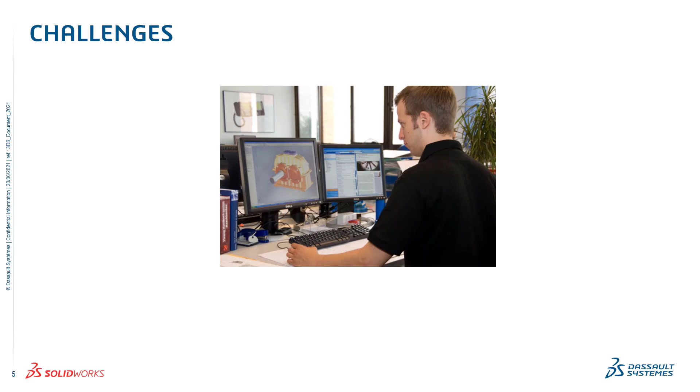But let's start with introducing the topic of the new trends that will be driving the future of design. The first topic is the IT overhead. As you know, lots of software that we are using today, think about your CAD or your ERP, require an IT infrastructure that needs to be maintained, updated, and protected. We are hearing more and more customers that have been attacked by hackers, their data is stolen, and they require some ransom to get the data back. So companies need to invest a lot of money in security, backup, disaster recovery strategies.

The next topic is mobility. So the software companies that have a good vision for the future from now until the next 10, 20 years well know that young people will guide the future trends and they are adapting to this. So today, many professional apps can work from a Chromebook or a tablet or a phone, and even your favorite CAD could work from mobile devices.

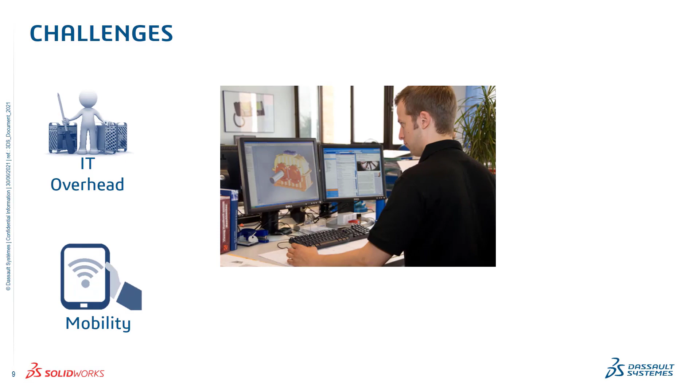Then let's talk about the data management. Recently, I was reading an article that said that young students don't really use personal computers much; they rather know the concept of devices and apps, but don't know the concept of folders because they are just saving into their device, and they know that when they are launching the app, they simply click on the open command, then search for what they're looking for. Maybe they can filter, for example, filter a document, and then they will find their data. So in the future, all of us will interact with our data with an experience that looks a lot like search engines.

And then we have the topic of collaboration. You know, lots of tools are gradually replacing emails. If I asked you how many of you are using WhatsApp or Telegram to communicate for work topics, many of you would say that you're doing that. And today, professional social networks are a very useful tool to follow up with our clients, partners, and collaborators in order to be always up to date on their projects or initiatives. Moreover, the pandemic has obliged us to learn how to use virtual meeting tools, and this enables us to communicate with anyone in any part of the world.

Then we have the topic of more power, which means the topic of modeling. Today, designers want to have powerful tools that will allow them to tackle much more complex projects in a very quick way. And the technologies are there because we have new paradigms like artificial intelligence, cloud computing, or design assistant technologies, or even generative design that allows us to create impossible shapes.

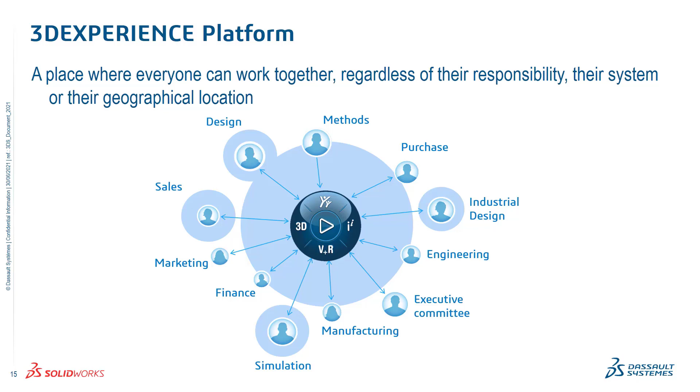So how does Dassault Systèmes help us with this topic? Well, Dassault Systèmes has developed the 3DEXPERIENCE platform, which is a cloud-based environment right in your browser that connects all the design project stakeholders, their ideas, the design data, and the solutions. And there is a plethora of tools for really every member of your team, not just design tools. So tools for project management, data and lifecycle management, 3D preview and markup tools, and built-in collaboration tools at every corner.

But today we're talking about browser-based design. Browser-based design tools can work from any operating system because they work from a browser. So they will work from Linux or from Mac. And they don't require any install. You simply need to launch your browser in order to use your app. And also they are being updated automatically, which means that the day after the update, you simply need to launch your design app and you'll find the new functionality and new features. Also, these tools have been developed with native touch support. So the UI has been really conceived to allow you to model and design from a tablet or even a phone.

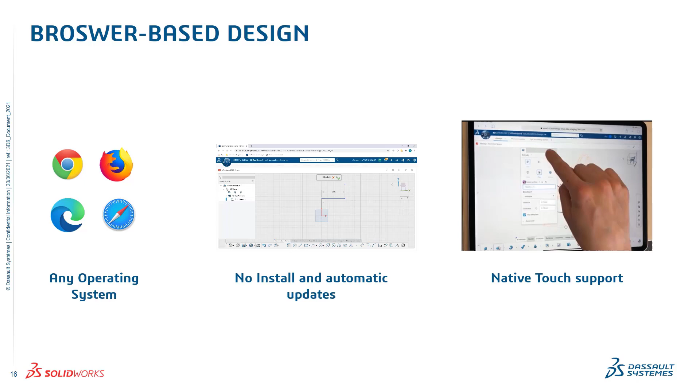These tools also feature automated data management, so this will allow us to get traceability like revisioning designs, keeping track of history, or maybe restoring an old iteration and taking another pathway by creating, for example, a branch.

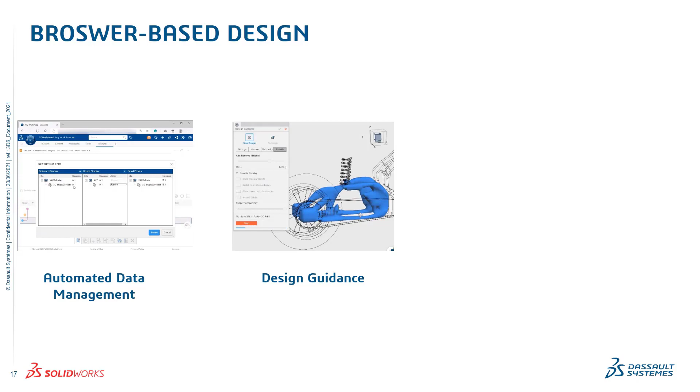There are new technologies, for example, like design guidance, which means that once you define your material, your loads, your constraints, and avoid areas, this tool will suggest you the shape of this component that will minimize weight.

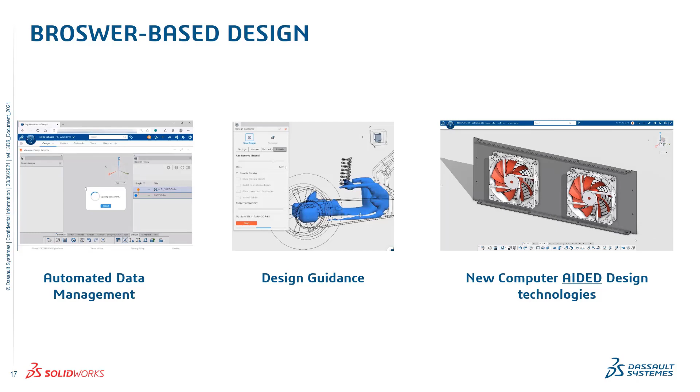And there are also some computer-aided design technologies, and I'm underlining aided because in this case, for example, I need to assemble that washer, and the system will suggest me with the artificial intelligence what are the most likely locations where I would like to mount that washer, and it will automatically mount the washer for me. And these technologies are learning from us, and they will improve as we are using them.

So he's going to assemble the winch, and he's going to use bottom-up techniques and also top-down techniques. But let's start with the bottom-up techniques. So Eric is going to start his day in the browser. So he's going to use XDesign directly in the 3DEXPERIENCE platform without installing anything.

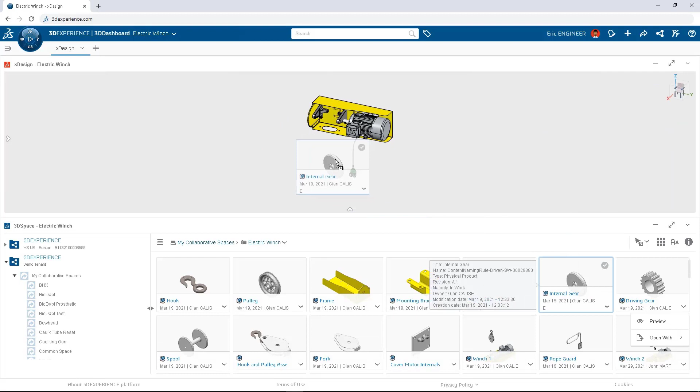And now Eric needs to insert a couple of components in this assembly, which are a couple of gears. There are at least a couple of different ways to add components. So you can simply browse to your data, to the list of your components, and insert the component by drag and drop inside of the assembly.

Or another option will be to simply search your component. You can use the precise name, or if you don't, you have filters on the left where you can filter by date or by meta properties. Then you can drag and drop the component in the assembly once you find it.

Here we can see that the insert component command has some new tools like the ability to insert more than one instance of the component. In this case, we need only one gear, so we will leave the default value of 1. We can also toggle a more convenient view of the assembly with the view selector. And we will start creating mates.

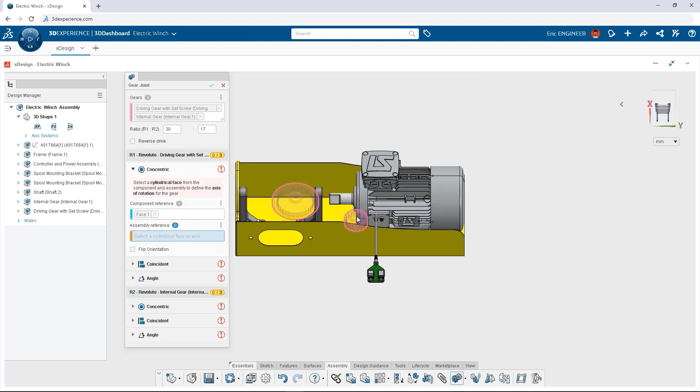So we have all kind of mates that we can leverage like in any design tools, but we also have some advanced mates that in XDesign are called joints that will allow you to create gears, rack and pinions, pulleys. In this case, Eric will create a gear joint. So all you need to do is selecting the two gears, and in this case, we are defining the gear ratio.

And then we're going to select the components to define all the mates that are needed to define this gear joint. In this case, we have a concentric mate, then we have a coincident mate to define the location of this gear. And then we also have an angle mate that will be used to basically drive the gear mate.

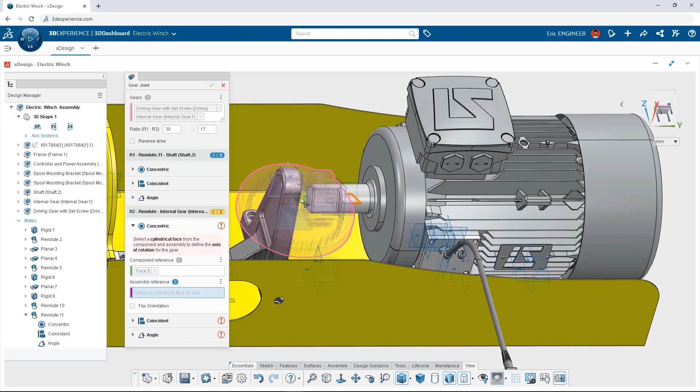You can also leverage some view filters, because in this case we want to show the planes, because this will be useful to define the angle mate that will actuate the joint rotation. So as you see, we are completing this gear joint that will connect the two gears, but also will connect the gear

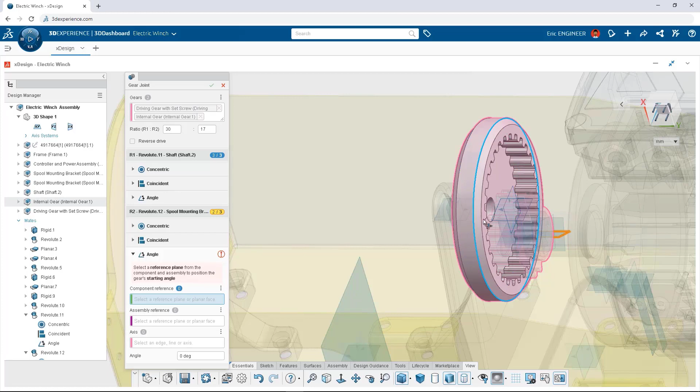to the bracket. So we'll finish like before, selecting the references for the coincident mate and also for the concentric mate, and then we will select the planes to define the angle mate. And the gear joint is finished. And also we can test the motion by simply dragging the components to check the real motion.

XDesign also features some quick shortcuts like the V hotkey that will allow you to toggle the view filters. In this case, we're hiding the planes because they are not needed anymore. The next step will be modeling a new component that will be the spool, and in this case we will use some top-down assembly technique.

So let's summarize what we've seen. You can assemble your designs from anywhere and from any device. The user interface is very intuitive because it's been created by the same team that has created the excellent SOLIDWORKS user interface. And you also have some advanced mechanical mates to simulate motion.

So next we'll be showing how you can model mechanical parts. In this case, I mentioned that we are going to create the spool, and this will be done with an in-context technique. So we can call it a top-down assembly technique.

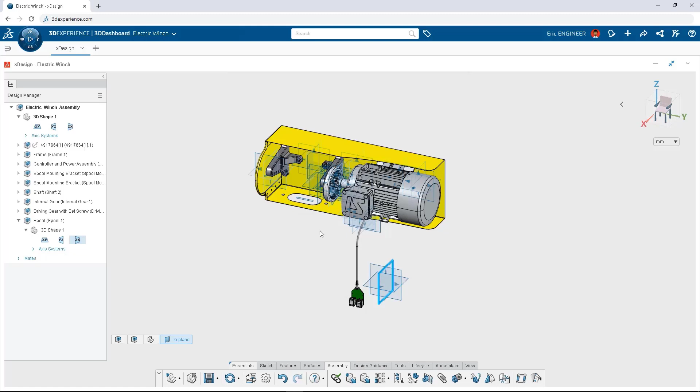So Eric will select the insert new component command. He will give the new name to the component, so he will call it spool. Then he wants this component to be exactly centered with respect to those two brackets. So he will insert a few mates on the planes in order to make sure that the design intent will be respected. Also here, we have the ability to choose if we want to activate external references.

By activating external references, you have the ability to create, let's say, adaptive components. So the spool will be able to update, for example, if the distance between the two brackets changes. So I will leave on the external references, and Eric will start a sketch. So he's going to create a rectangle. And as you see, it will create some references with respect to the bracket's existing geometry. In this case, the sketch will be completely defined.

Then he will add some more geometry to create this spool. By pressing the S key, the shortcut bar will appear, and this will allow you to select some sketch commands, minimizing the mouse travel. So in this case, I'm going to choose the trim command to eliminate some geometry. As you see now, there is some blue geometry, which means it's not completely defined. So I will create some dimensions to define that geometry. I'm putting a first dimension, and then as I put the second dimension, the geometry will become completely black, which means completely defined.

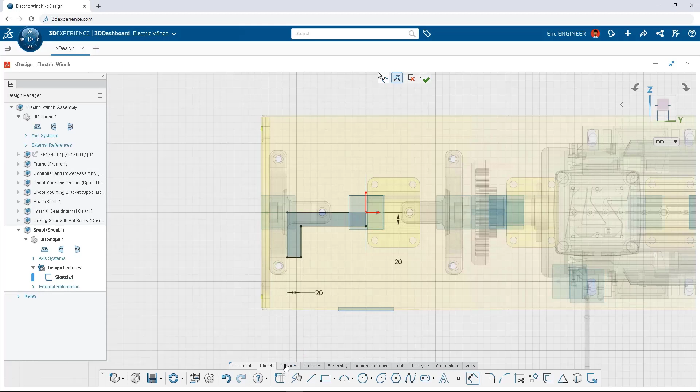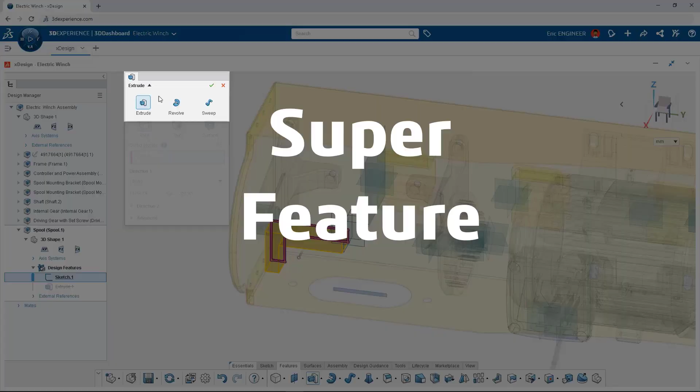Then I'm going to go to the Features tab, and I'm going to invoke the Extruded Boss command. If I were in a traditional CAD system, I would have to cancel the feature and recreate it from scratch, and maybe all the downstream features will fail. In this case, we have the concept of super features, which means that I can switch between an extrude, a revolve, or a sweep as desired, and the feature will switch, and also the downstream features won't lose references and will update. In this case, I'm going to change the feature to revolve, so all I need to do is select the revolve axis to define this revolve feature.

Then I need to create some fillets, so I will select one edge, then the context toolbar will allow me to quickly choose the fillet command to reduce mouse travel. And here we have the first example of artificial intelligence. I can select the selection helper icon, which will give me some suggestions on where it's most likely that I want to create other fillets. So I will confirm, but I can still select additional edges for my fillet command. So it will be 5 millimeters, and I will confirm the selection.

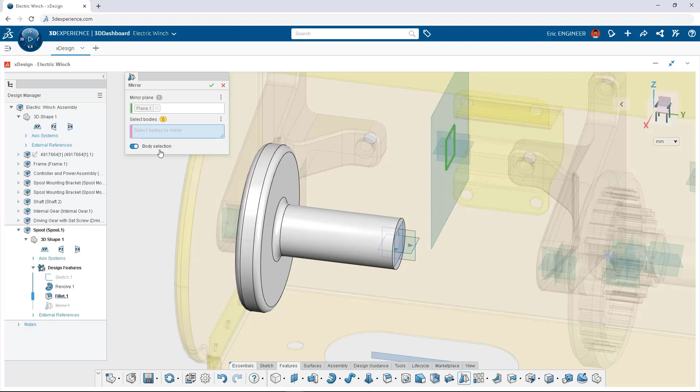Then I'm going to mirror this model because the design intent is to have a component that is always centered between the two brackets, so I can see my nice preview, and then I can confirm. Then I need to add some more geometry. I will create a new sketch. But rather than creating geometry from scratch, we have the ability to reuse existing geometry thanks to the insert sketch command.

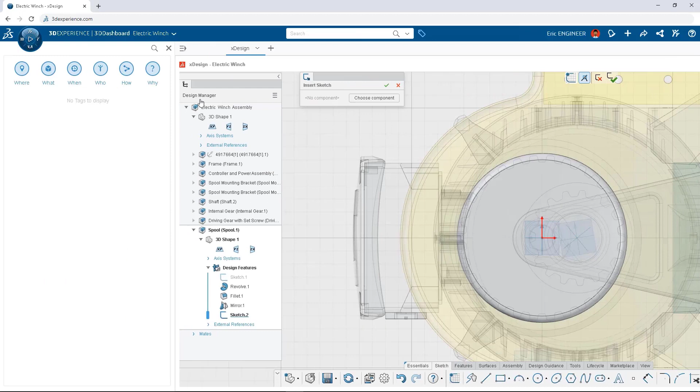So this command will allow you to search for a component where this sketch geometry was present. In this case, I remember that the sketch geometry I need is present in a component named skeleton key lock. So I simply type the name of this component. I can select this component, and then the insert sketch command from a drop-down menu will allow me to select the sketch that I want. So I will select the skeleton key, and then I will insert the sketch. And this will save me a lot of time because this is geometry that I could reuse from another component.

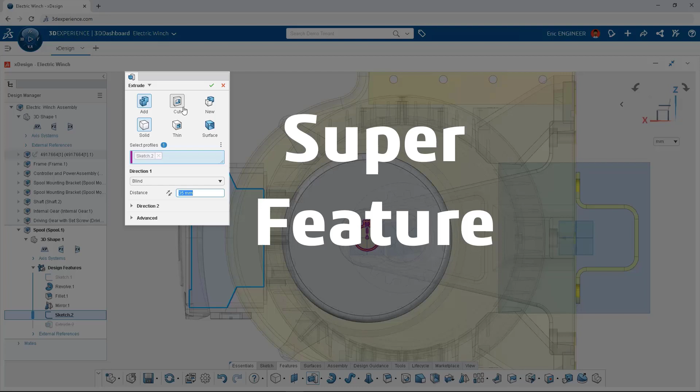Then I'm going to create a cut. Again, I chose the extruded boss, but this is not a problem. I don't have to cancel. I can switch to a cut feature, and I could even from this command create a thin feature or even a surface. There is a lot of flexibility thanks to the super features. So in this case, I will select the cut extrude command. I will define a through all direction cut, which will completely cut my model.

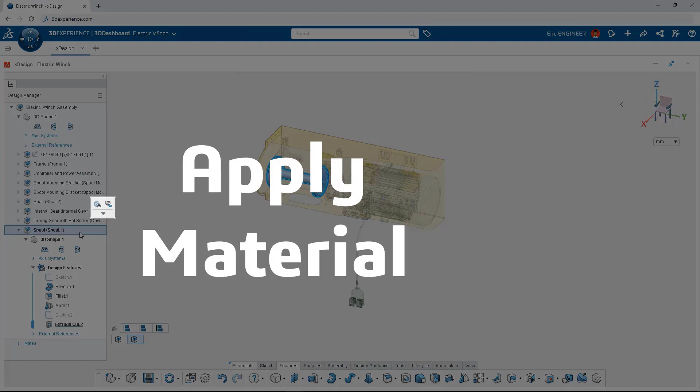And the last thing that Eric now needs is to apply some material. So he will select the component, and then he will choose the apply material command from the context menu. So Eric, in this case, can choose the 1023 carbon steel.

And then we're finished with the part. We can switch to editing the assembly by simply double clicking. So as you see, this is really very quick. And we want to test how robust this parameterization is.

In this frame component, there is a layout sketch that defines the distance between the brackets. So we're going to modify this sketch. And here we have a 250 dimension that will drive the distance between the brackets. So I'm going to change this distance from 250 to 270.

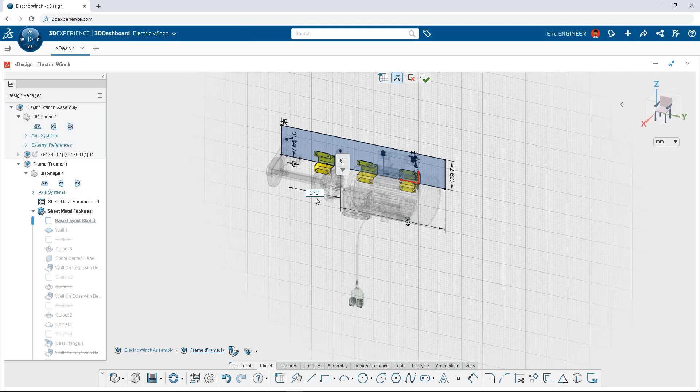And the result of this operation after the rebuild is that the distance between the brackets will increase and also the spool will follow up. Next, Eric wants to check on the progress made by Debbie on the controller unit, which is the green PCB you see connected through a cable.

Eric double clicks on the controller and power assembly, and he gets this message that pops up and says that the component is reserved and also mentions by whom it is reserved, which is Debbie. This means that he won't be able to make or save any changes, but there's good news. He can send a request to Debbie to unlock the geometry.

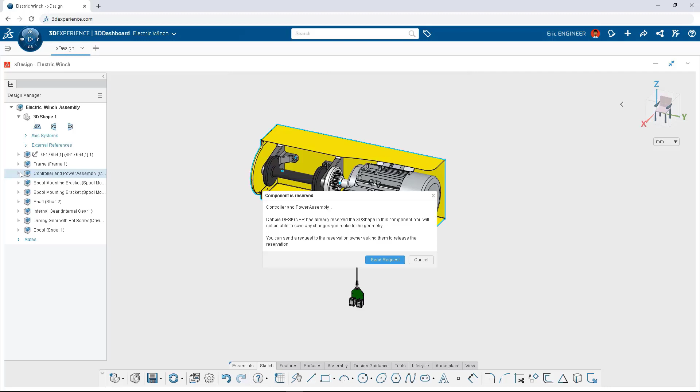So he will click on send request, and this will give Debbie Designer a notification instantaneously that Eric needs to work on that model, and Eric's work is pretty much done for now. So let's recap what we've seen. You can make parametric part design from anywhere, any device. You have new modeling paradigms like super features and artificial intelligence.

And with the built-in data management, you can collaborate when you are in a team, for example, by getting this warning that someone is using your file, and then you can ask to kindly unlock it. The next topic will be the design of the controller with subdivision modeling. So in this case, we will switch to Debbie Designer, and she will be in charge of designing the controller using sub-D modeling with an app called xShape.

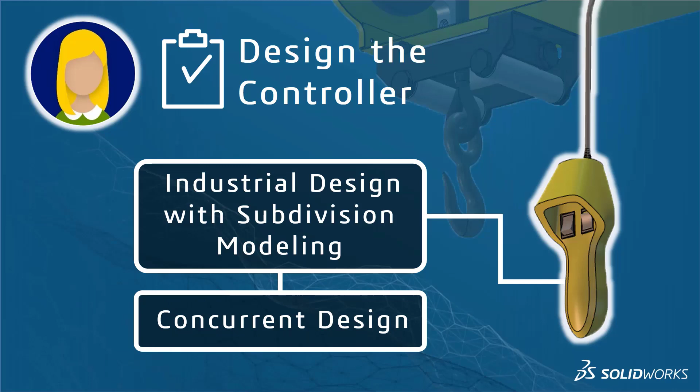And she's going to do this at the same time as Eric is working on the assembly. So we're going to switch from Eric, who was working on the assembly, to Debbie working on the subdivision modeling. So Debbie will see the notification from Eric that is requesting to release the lock.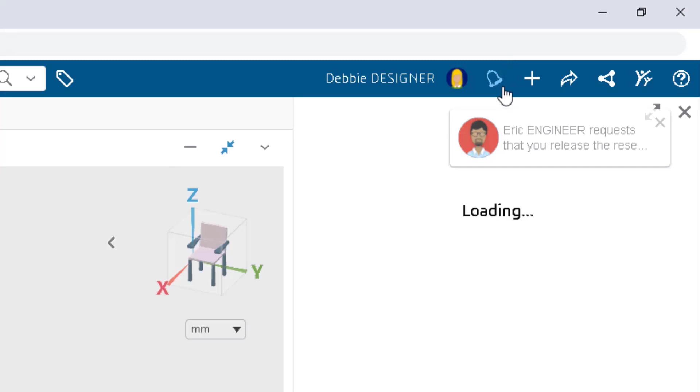So you can check your 3DEXPERIENCE notifications by clicking on the bell icon, and by clicking on the notification you get the opportunity to unlock the model. But at this point Debbie is still working on the assembly, and she's not ready to give it up yet. So she's starting a conversation with Eric through the side panel, informing Eric that she's still working on the model and that she'll message him when she's done.

Debbie starts working on xShape, which is a sub-D modeling app. And the first step is adding a primitive, which is almost like a digital hunk of clay. She's going to add a box shape, and she can resize it in any of those principal directions. She can also change the number of control loops that go around the model.

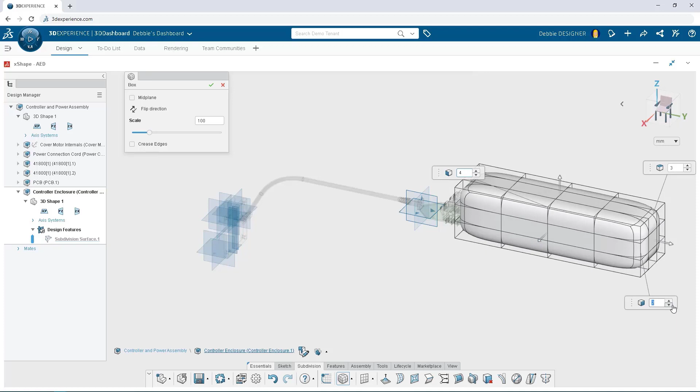And we usually say that less is more, meaning that you should start with less subdivision to have more control of the shape, and then you can refine later on where more detail is needed. What you see now is the robot, and this is the main tool since it's the main way to manipulate the model. It looks like a triad, so the arrows are used to translate the whole body or just the selected area of the model.

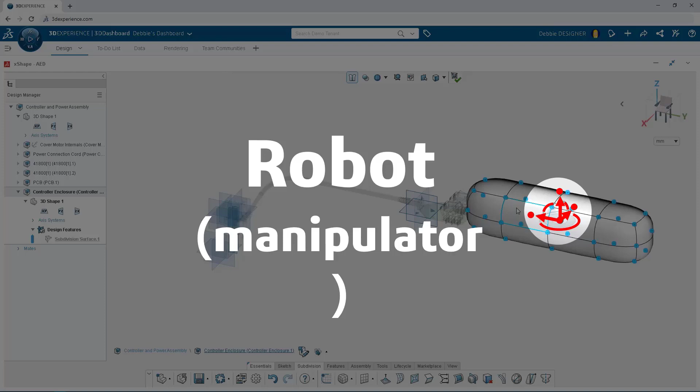Then you can also use the arcs for rotating your selection, and then there are the points at the end of those arrows for scaling. And you can translate, rotate, and scale all in one tool, and that covers a big percentage of what you'd actually want to do with subdivision modeling.

Debbie will align the model, but she needs to have it centered with respect to the middle plane. So in this case, after moving the model, if she selects the plane, the in-context toolbar shows a command to center the sub-D model. The in-context toolbar will show up with different commands based on what you select.

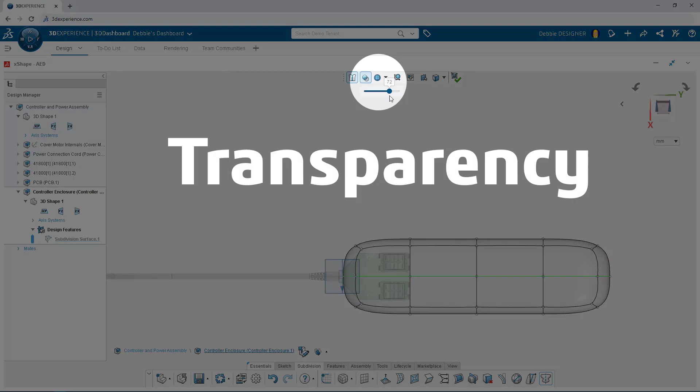xDesign and xShape are predicting what will be my next move. Then, after centering the shape, Debbie will select the icon to turn on symmetry, which means that whenever I make a change to one side of a model, that will also happen on the other side. And when you design around internal components like an enclosure, it's very nice to get a reference for size and shape with being able to turn on transparency.

And we can also scale, and you can do it by simply dragging points. You can also translate the sub-D faces to reduce the overall length, and you can also move the whole body. And we'll also refine the side by using the little arcs to rotate the surfaces of a model.

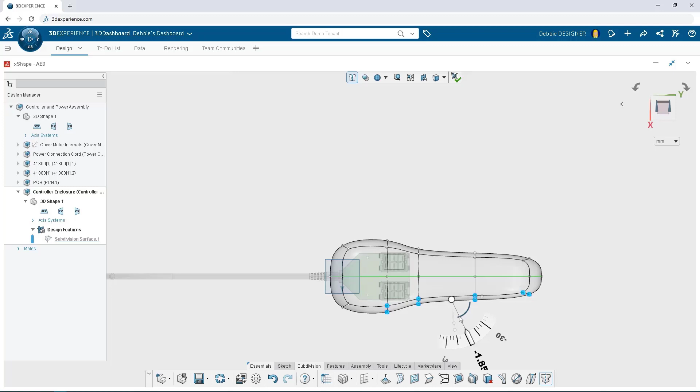After I get the general size and shape of this model, I want some protrusion on the top of the model for ergonomic reasons. And for this purpose, I can click on the face, and then from the context menu, select the Extrude command. And this command will add a protrusion out of the front face. And another quick way to modify geometry without using the robot is inserting loops. So in this case, I'm selecting an edge, and then after selecting the insert loop command, it's creating a new loop perpendicular to the edge that I selected.

And now here's another way we can add more control: the subdivide faces tool. So I selected 5 faces. I will select the subdivide face command, and this way we can refine the shape in the region of those selected faces. With sub-D modeling, everything is always curvature continuous, but maybe I don't want everything to be so soft. I want some sharp corners, and that's where the crease edges command will come into play.

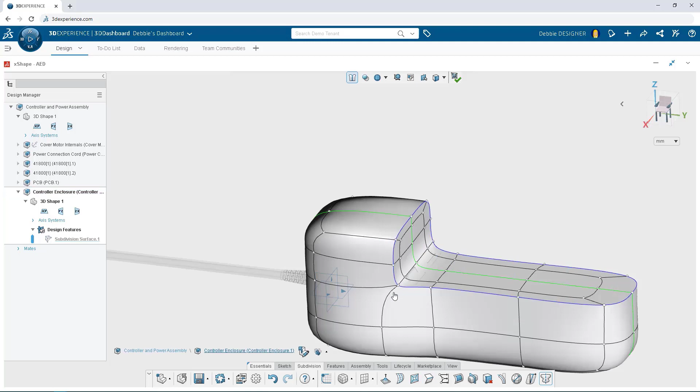I'll crease some of the edges, but this command is also very useful when you want to create some hollow regions of a model. I'm basically creating an area that will host the buttons, and I will add more creases to make the model look better. And then I will select some faces and simply push them in to create the hollow region. Also, I don't want those edges to be curvature continuous, so I will select them, and from the context menu I will add another crease.

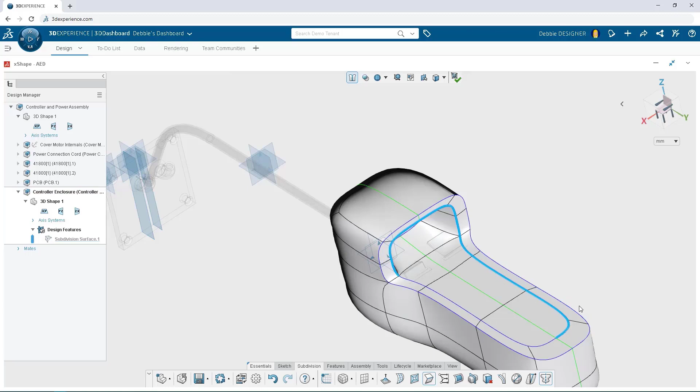So notice that the same team that designed the best-in-class SOLIDWORKS UI is involved in designing the UI of these tools of the future. I never touch the toolbar. All the tools are at my fingertips near my mouse.

I'm going to make further modifications, and then I'd like to highlight some specific robot settings, because right now the robot will automatically align on my selection, but if I need to move faces only in the XYZ direction, I can change the robot settings. So in this case, I will right click and then I can select the XYZ option, which will allow me to move the faces only in the XYZ direction.

So we often get the question, how precise is subdivision modeling? Well, it's as precise as you want it to be. One help can be numerical input. I can select everything I want, and then instead of pushing and pulling the arrow, I just click on the arrow, and then I can type a numeric input for how much I want it to move. In this case, I'm going to move the faces by 5 millimeters, but you can also type -5 to go in the other direction. That's a way to have a very precise dimension.

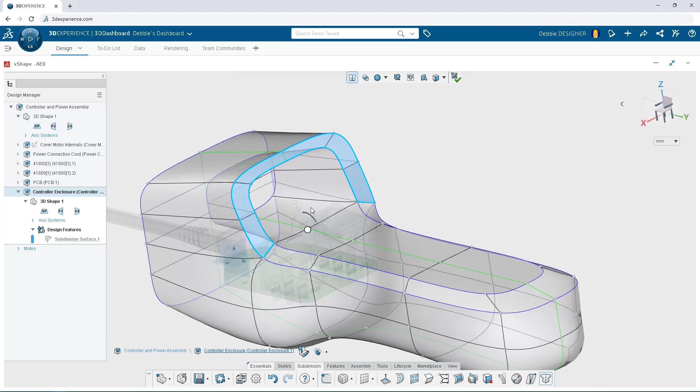When you manipulate the faces, the result is based on where the robot is, but in some cases you might need to move the robot to get the results you want. Think about the rotation. Indeed, I want to rotate the selected faces about the bottom edge, so I can put the robot there and then rotate the faces about that hinge point. I'm going to select some faces since I want to make sure that they're all flat, and for this purpose I'm going to use the align coincident command from the context toolbar.

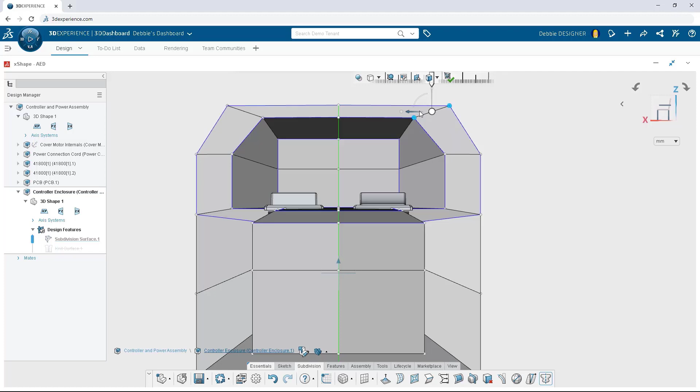So after making the face flat, I can activate the cage view to see what the surfaces really look like, because sub-D modeling has its foundation in polygons, which are then smoothed out and become surfaces. And the cage mode will basically show the polygons. The advantage of cage mode is that in this mode you can make faster modifications and you can quickly identify interferences and make adjustments, although there is a specific command that will highlight any self-intersecting faces on your subdivision model.

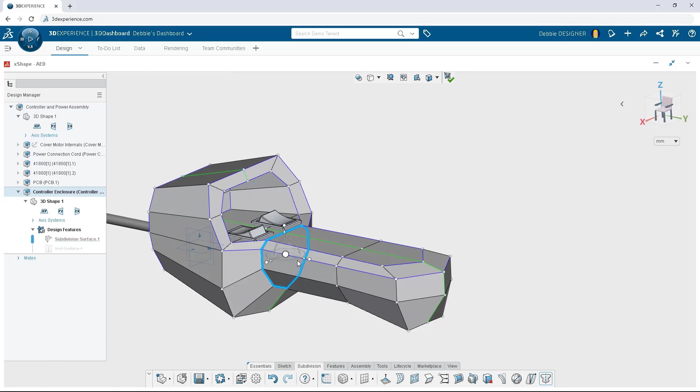So you see, you have a lot of flexibility of making some modifications to make the aesthetics of this model much better. If we had to do these modifications on a parametric model using surfaces, we would have needed a lot more time and maybe faced some errors. We finally go back to the surfaces mode to see how the model looks, and then we can do some further refinement of the model. The model looks very, very good.

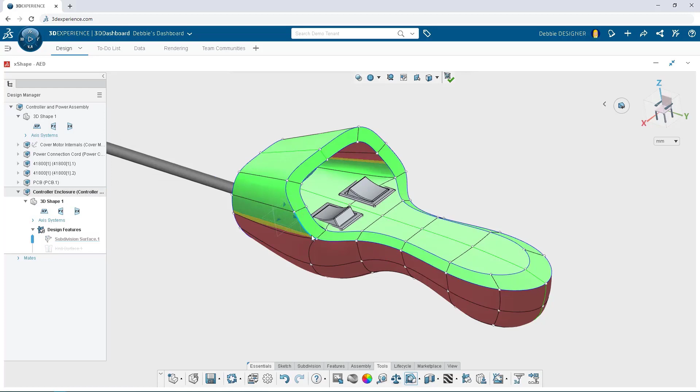xShape also includes draft analysis tools. What's great about it is that it's dynamic. I can set a draft plane and it will colorize my model with positive and negative draft. I can change my model and watch the colorization dynamically change, and this way I can make some adjustments to make the yellow color disappear. So the faces with no draft have been eliminated.

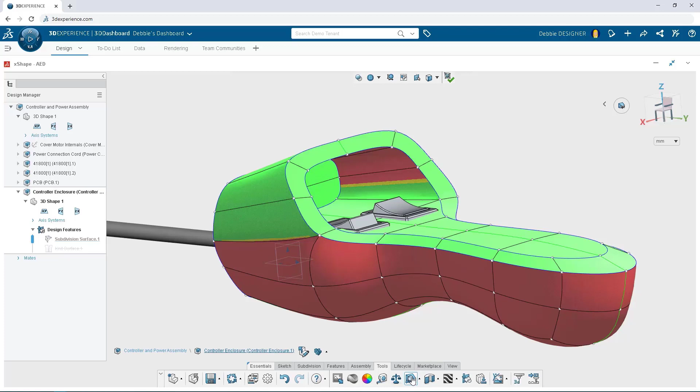But then I need to make some parametric modifications, and what's great about our browser-based design apps is that they can work together. So once I'm finished with the sub-D model, I can switch to my parametric modeling design app, which is xDesign. After switching to xDesign, the interface hasn't changed at all. What's different is just the set of commands, which in this case is features to create parametric functions instead of free-form modeling.

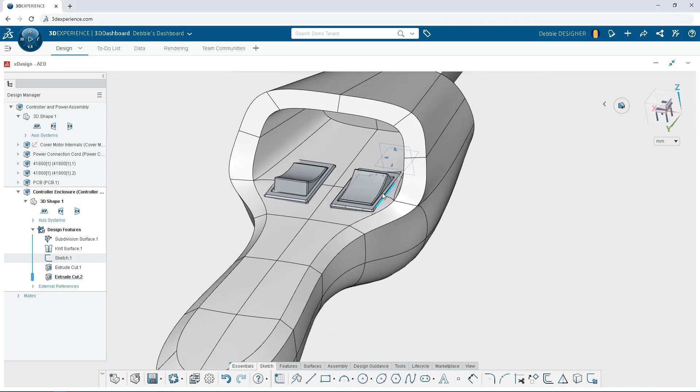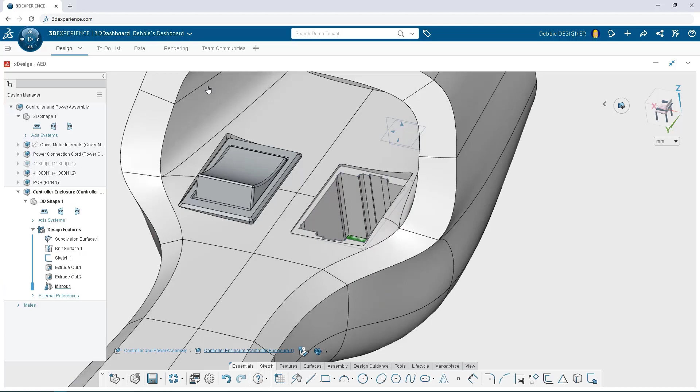In this case, I will create a through-all cut for the button. And notice I didn't even need to create the sketch. The face was used as a profile. I will hide the button to show what the hole looks like. And then instead of recreating the cut, I will press S to make the shortcut bar appear. From here, I can select the mirror command and mirror the cut from one side of this model to the other. This modeling is almost finished.

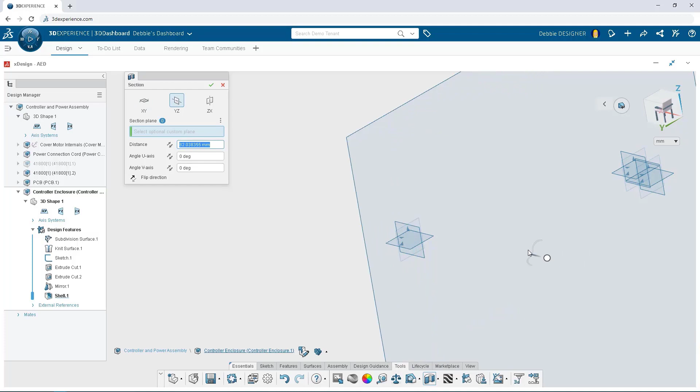I need the final touch, which is creating a shell to add a uniform thickness to the model. So in this case, I'm going to define a 1 mm thickness. I will shell the whole model to make it ready for injection molding. I will get my preview, and in order to understand the result of this shelling, I can use a convenient section view command to show that this model is actually hollow. So I will select the YZ direction. I will flip the section view. And of course, this is just a concept. More features will be needed to make it moldable.

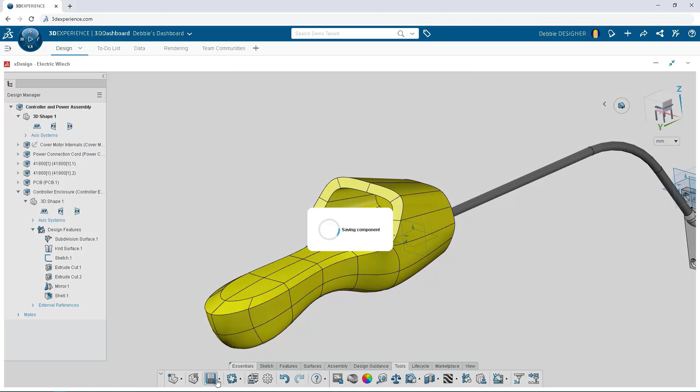Then I can change the color of the model, so I can choose a yellow color. After changing the color, we can save this component to the 3DEXPERIENCE platform on the cloud to make it available for everybody. So I click on the save icon. Also, the design apps feature the ability to create to-do lists. Since I had a task defined for this model, I will drag and drop the model to a task which was in work state. And since I'm finished, I can move my task to the completed state, so that my peers will know that this work has been done.

So we want to close the loop with Eric, so let's get back to the conversation with him. We will let Eric know that we're done with the controller subassembly we were working on. So Debbie is done. This means that Eric will need to do a refresh, which will reload the latest version of the subassembly from the server to see the changes. We will now switch to Eric. Debbie said to refresh, so let's click the refresh button to refresh that specific subassembly. Eric likes Debbie's work, even the color, which matches the sheet metal frame, and responds to Debbie.

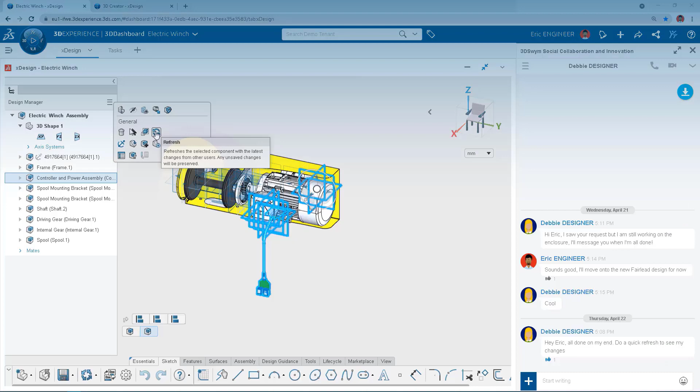So let's summarize. With xShape, you can conceptualize in seconds and very quickly create a complex model. You have the free form given by subdivision modeling, but you don't sacrifice precision and control because you have all the tools to wield them. And we've seen that with the immersive communication tools, we can collaborate very efficiently with our peers.

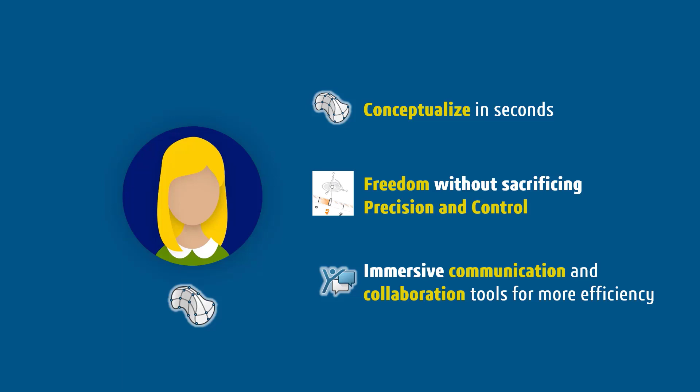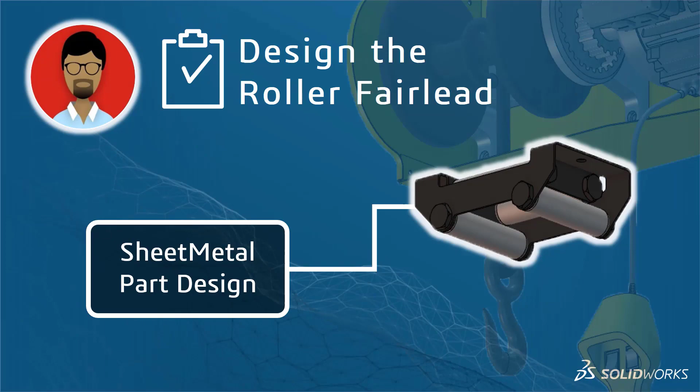So now let's see the next topic, which is the design of the sheet metal roller fairlead. We will go back to Eric, who will be in charge of designing this sheet metal part using some sheet metal part design techniques. So let's start working on this fairlead frame. We will open another widget, and here we have a subassembly with some layout surfaces. Basically, these surfaces have some dimensions that will define the spacing of those rollers, but this will also drive the fairlead frame.

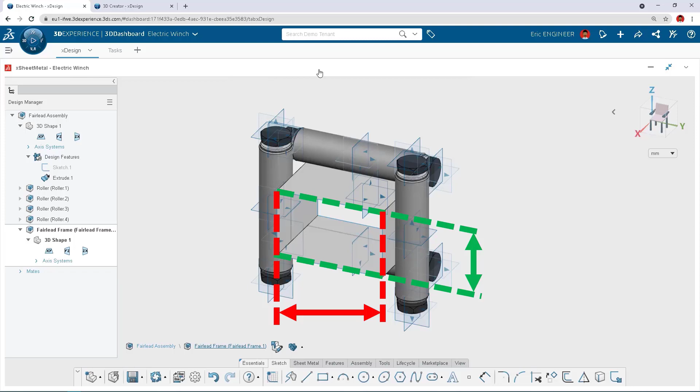So Eric will start by sketching the base plate. And in this sketch, he will reuse as much existing geometry as possible, for example, by using convert entities or by creating some geometry that will snap to existing entities. In these design apps, dimensioning is very easy. You simply need to click on an entity, the dimension will show, and then you simply need to change it. Let's press S to bring up the trim tool.

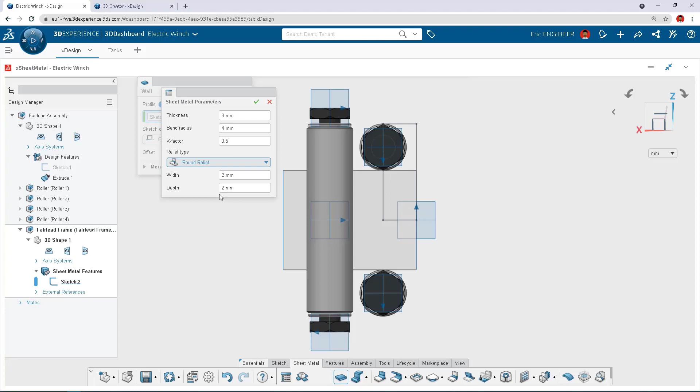So Eric will trim some entities to complete the contours. And after doing that, we will create a wall. The first thing we need to do is to define the sheet metal parameters like thickness, bend radius, K factor, and also the relief is important, so he's going to choose the round relief option. These parameters can be changed later at any time and they will impact this wall feature. We will select the profile that will be part of this wall feature, and then we will confirm.

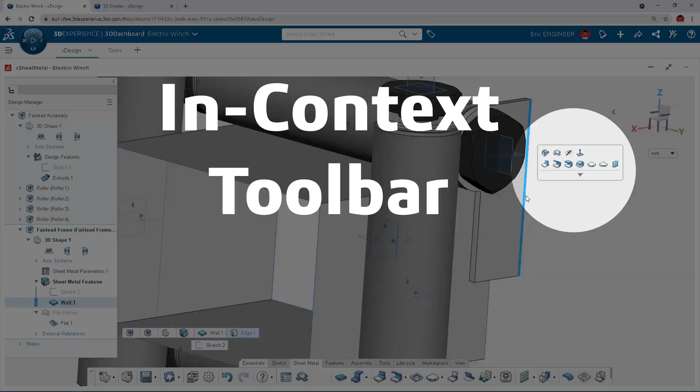Eric can click on one edge, and the in-context toolbar will show us the commands that are only relevant to the sheet metal, and one of them is wall on edge. So with just one click, we can access the command and adjust various parameters like the material height or the height of this flange. And we can make the height 65 millimeters. We'll do exactly the same thing again to make a new wall for the top part of the fairlead.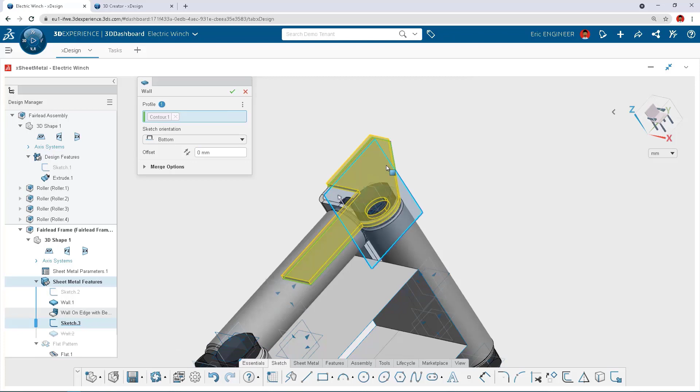So in this case, we are in the modeling environment, and we only have sheet metal tools relevant to that environment. We will make a new wall from the S key menu, but after creating the wall, you will notice that we have two separate sheet metal bodies. How do we connect them? Well, there is the bend feature, which will add a bend between two walls. So we will use the bend to merge the two walls. It's very simple. You just need to click the two bodies, and now they're joined into one with the relief that we've set.

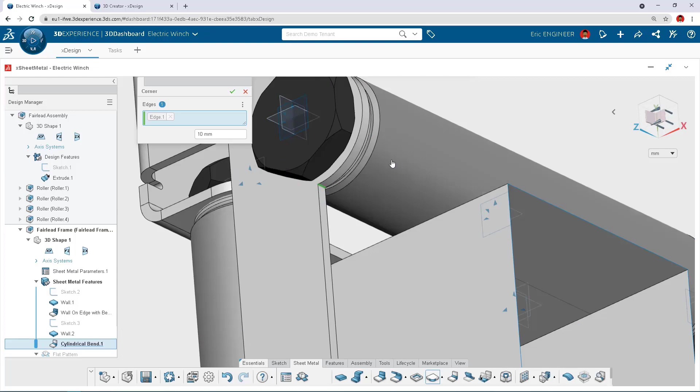There are some sharp corners that need to be filleted, and when you click on one edge or an entity, the in-context menu will predict my next move, which will give me the option to add a fillet. I can use the suggestions from the selection helper again with artificial intelligence. Looks good. I'll accept the selection helper recommendation and also grab a couple more to define these fillets. The 10 millimeters radius is okay, and my part is finished.

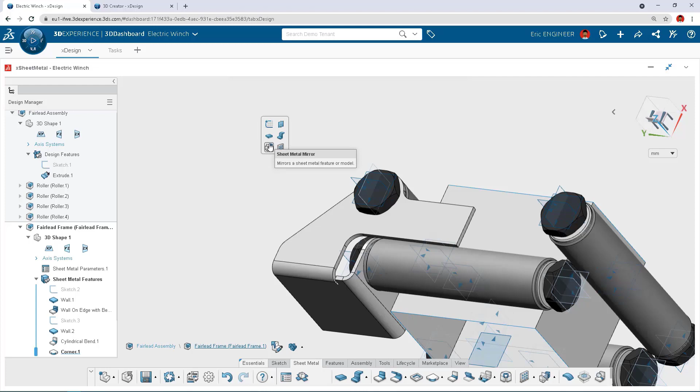Actually, this is only 1/4 of the part, so I will click the S key again to get the shortcut bar near my mouse, and I can mirror everything I did. So from the S key menu, I'll select the mirror command to mirror the entire body, and this will allow me to create half of the body. So I will need to do this again. So I will select mirror body, select the mirror face, and now it looks good.

All I need to do now is to add a material, since it will be very important to choose one that will be strong enough. 1023 carbon steel should work well. I could search for material or just look in these folders for material type. Looks good now. I want to see a flattened version of this sheet metal part, and I can do that directly from the context menu by clicking a face. If I want, I can go back to the folded view in the same way.

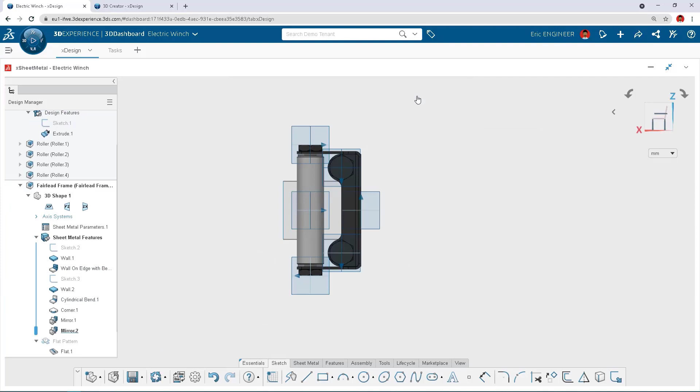But now I want to see how this frame responds when I make changes. So I want to edit the sketch at the assembly level that drives the position of the roller. If I don't want to go back in the sketch, I can use the Edit Sketch Dimensions option to save a few clicks, because the dimensions will appear, and I will change the dimension from 120 millimeters to 135 and see what happens. As we see, the geometry updates perfectly as I would have expected.

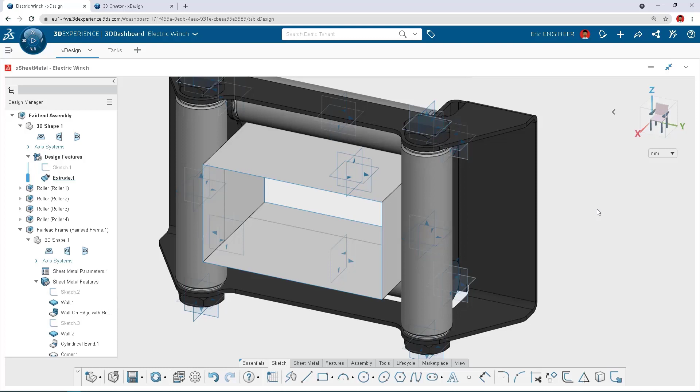But now it's time to add this component to the fairlead assembly. So I can minimize this widget. I will see the other instance of xDesign with the entire assembly. I can drag and drop from the design manager right into the other assembly to insert it.

I can add a couple of basic mates to position this. We will do this very quickly since you've already seen this process. So the aim is to have this again in a centered position. But now I need a hole in this fairlead frame in order to attach it to the whole winch.

So I want to roll back in my design so that I only have to add this hole once. And I can do that in sheet metal. So I will create a new sketch on this face, and rather than sketching the circle, I'm going to find the existing hole in the winch and recycle it with the convert entities command to project the geometry. I'll then use this sketch to punch a hole through the fairlead frame, and then I will confirm the feature.

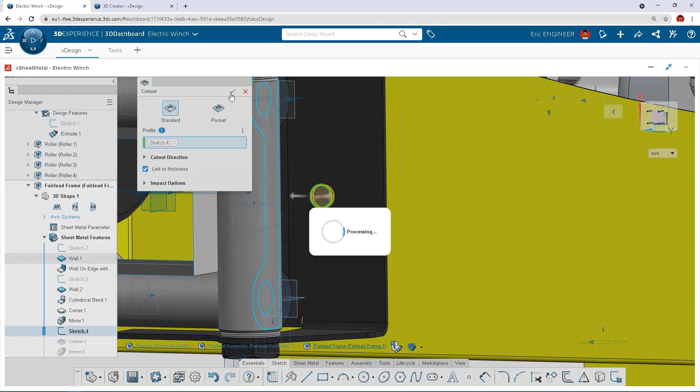Looks good, and as you notice, this geometry is all driven by other components, and that's great when you need to update it, because you'll be 100% sure that the holes will always be aligned. Now I will roll forward once again, and we can then visually verify that the hole now propagated to the other side of this frame.

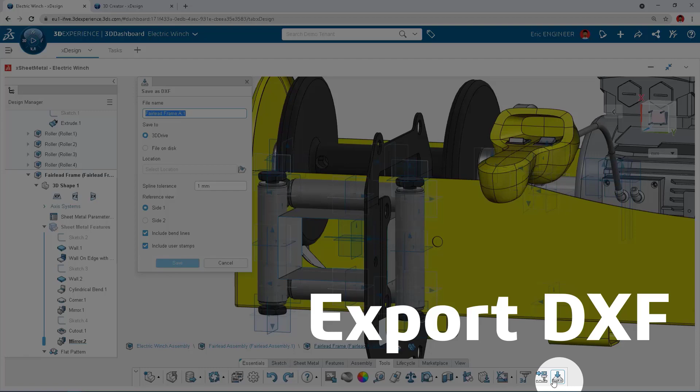So this all looks good, but one of our deliverables for this design is a DXF of a flat pattern so that we can get quotes from the sheet metal manufacturer. In 3D Sheet Metal Creator, the role that includes this app called Sheet Metal, there is an export to DXF tool that we can use.

We can save directly to your hard drive, or we can put it to 3D Drive, which is the generic storage app on the 3D Experience platform. So let's use 3D Drive, and we can now see it show up on the right here in the side panel. And we have some options to share it.

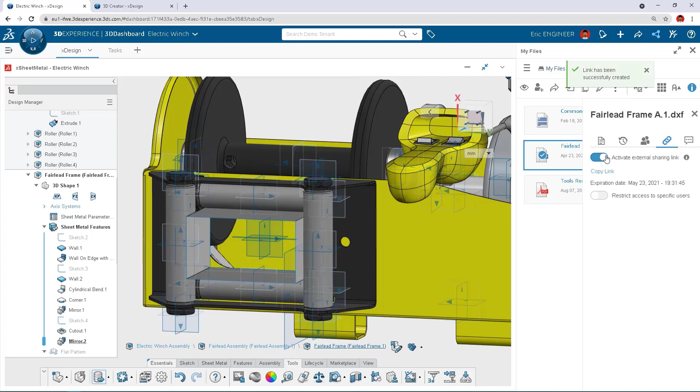We can activate an external sharing link to send to the manufacturer, which will be able to look at this file without installing any software. Anyone can click on this link and see the content as long as they have a 3D Experience ID. If they don't have one, it takes less than 30 seconds to make it.

So what does it look like from the manufacturer's point of view? Here is what they will be able to see in the window. They can mark this up, they can download it, print it, and more directly from here. And so Eric is done.

Let's recap. So we have a sheet metal design tool that allows you to design from any device, which has all the features that will make this part manufacturable, and will also allow you to create the flat patterns to export it to DXF. And thanks to the storage app 3D Drive, we can easily share the DXF with your customers and peers, for example.

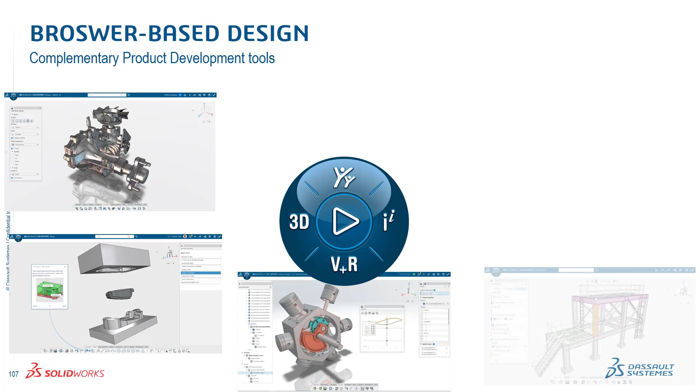So we've seen a few browser-based design apps, but there is an ecosystem of apps. You get apps for designing weldments, to create product manufacturing information, to create renderings, presentations, to create molds, and also to do algorithmic generative design.

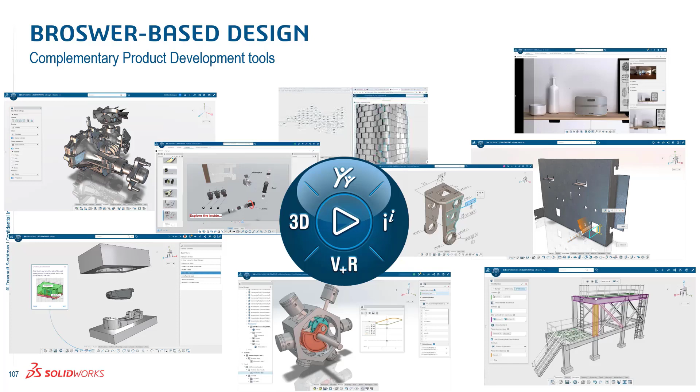So in the 3D Experience platform, we have apps, but they are organized in roles from a licensing point of view, functional roles. So you could subscribe to the role to do subdivision modeling if all you need to do is subdivision modeling. If you want to do only sheet metal, you have the role called 3D Sheet Metal Creator that will allow you to do only sheet metal design.

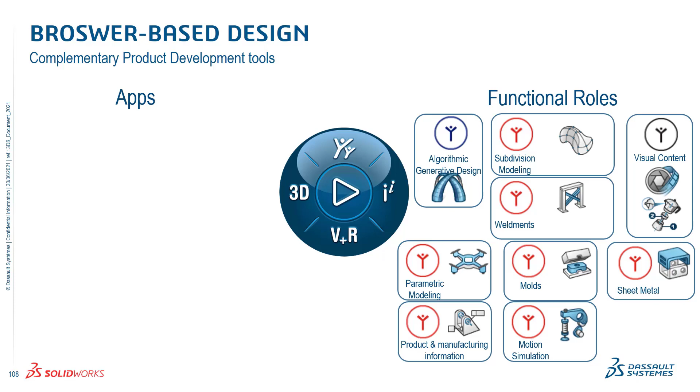And this is great with respect to traditional CAD, because in traditional CAD you buy software that will do a lot of things, but maybe you're only using 10% of the capabilities. So this roles concept will give you more flexibility.

So in summary, the 3D Experience platform will completely eliminate the overhead because you don't install any software if you have browser-based design roles, and you don't even need a server because you have secure cloud data management. You can collaborate very easily with your team members, with customers and suppliers.

Your data is always available anywhere and from any device, and you can even design from any device. It's very easy to deploy since you don't install anything, and you get very frequent updates, something like every 2 months. With these apps that are complementary, they work together.